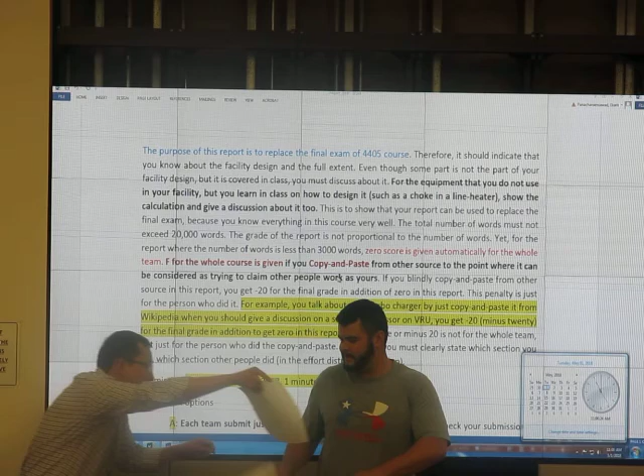For today, we will talk about the project. After we finish talking about the project, we will talk about homework, and then we will talk about flow assurance.

All right, the project. Who read this yet? Anyone read this? Question? No question? Really? There should be some question.

Okay, this time I will make the grading very accurate. What you will do is there are 3 sections.

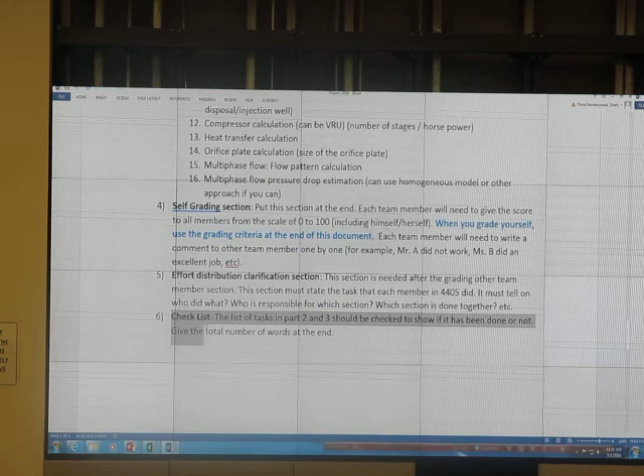See, section part 1, okay, part 2, part 3, okay, and you will do self-grading section, effort distribution section, and there's a checklist.

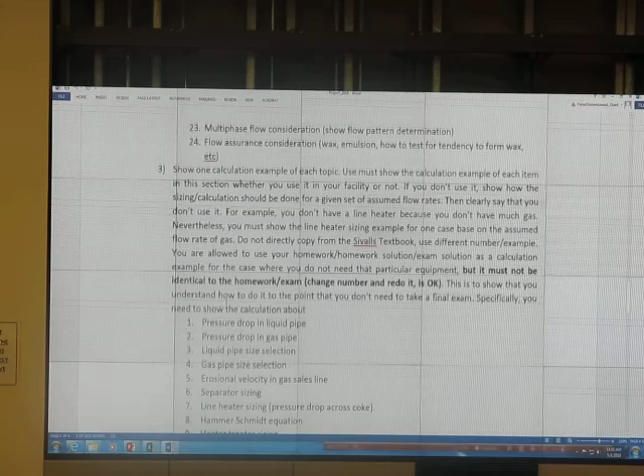Black one, okay, look at this. Calculation example, 40 points. If you do everything but you miss 4 points - everything means, okay, there are 16, number 1 to number 16.

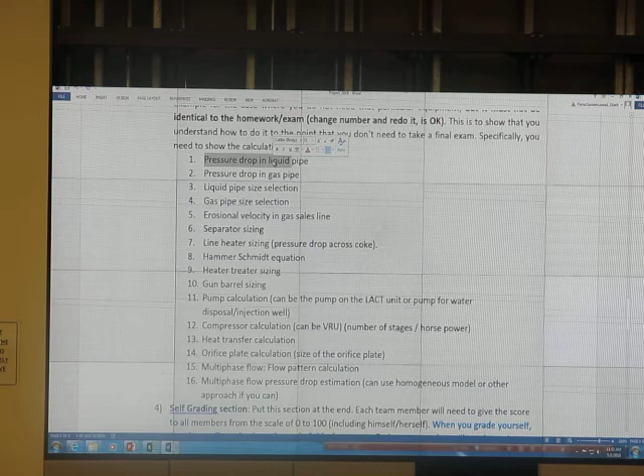If you miss 1, instead of 100, let's say everything else is perfect, you get 90. If you miss 2, you get 80. If you miss 3, you get 70. If you miss 4, you get 60. It is difficult to miss unless you intentionally try to miss it.

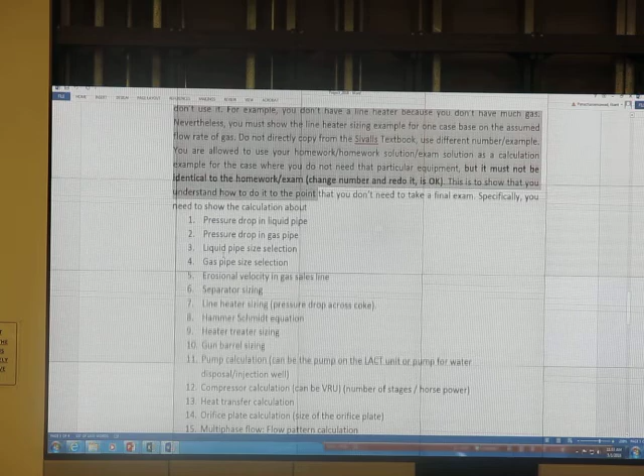So read it, but basically, whether you have the equipment or not, you will show the calculation for each of these.

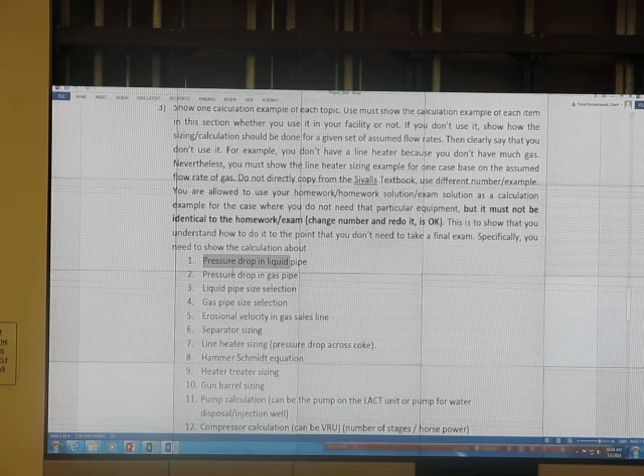If you don't have the equipment in your field, what you do is you say, let's say you don't have any liquid pipe, you say in this project there is no liquid pipe. Nevertheless, the calculation example is given here as follows, and you come up with your number - flow rate is this much, elevation term is this much, pressure drop or something. Got it? So whether you have it or not, you will write about the calculation part.

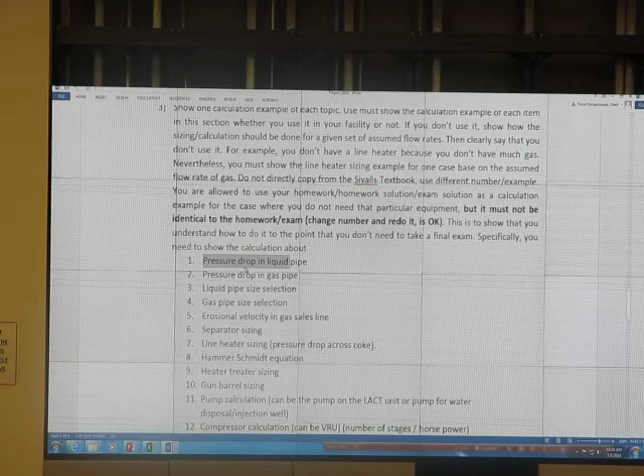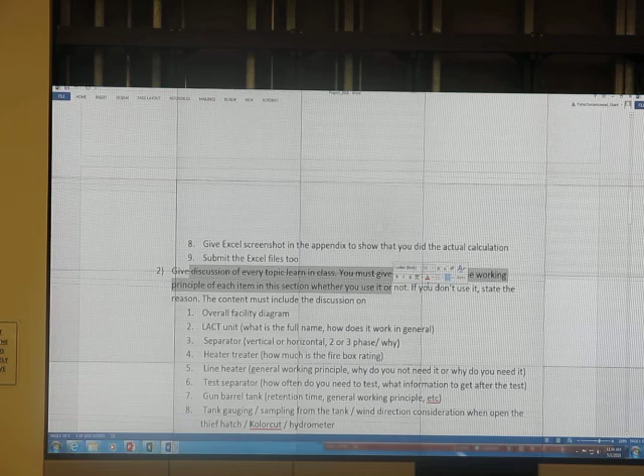You will do the calculation. And same thing is over here - give the discussion of every topic learned in class. You must give discussion on the working principle of each item in this section, whether you use it or not. If you don't use it, state the reason. The content must include the discussion on blah blah blah blah.

Let's say you don't use line heater - I think none of those groups use line heater, right? You will give discussion about the line heater. You say, okay, in this project, line heater is not used. The discussion of line heater is given here for the completeness of the project.

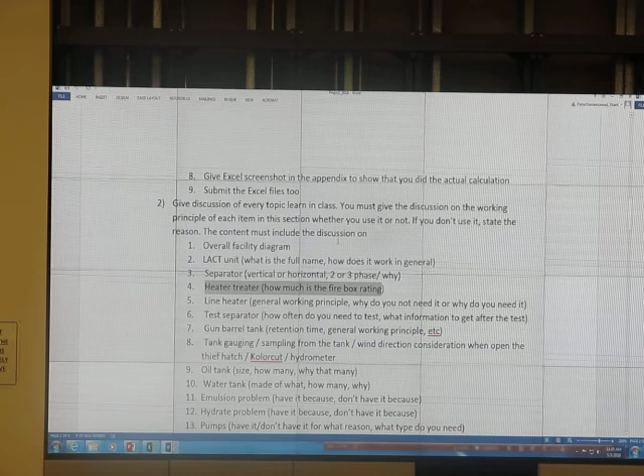Line heater is used mainly for preventing hydrate formation. The way it works is blah blah blah blah. You don't need to show any calculation example - calculation example is over here, line heater sizing. I know that you don't use line heater, but you say you don't use line heater.

But line heater sizing is based on this, so you show hydrate chart. Assume that hydrate formation temperature is this much, and assume your specific gravity is blah blah blah. You may take the homework or the exam question to show your calculation example, but it must not be identical - you have to change the numbers and redo it.

The purpose of all this is to make sure that you know everything in this class, and we can use it to replace the final exam. If something is already in your project, discuss as usual, but if it is not, you still show a calculation example on this part. There are 16 things to do calculation examples for.

And we have heat transfer calculation, we will cover it today. You will give the calculation example.

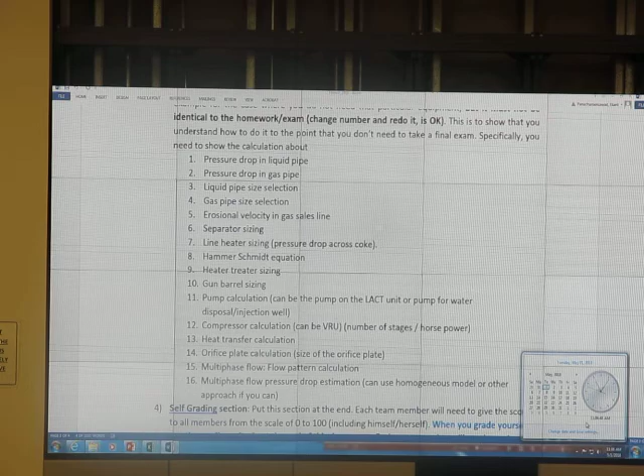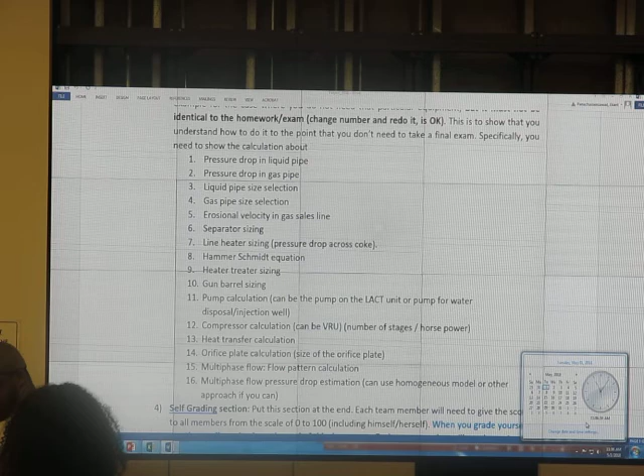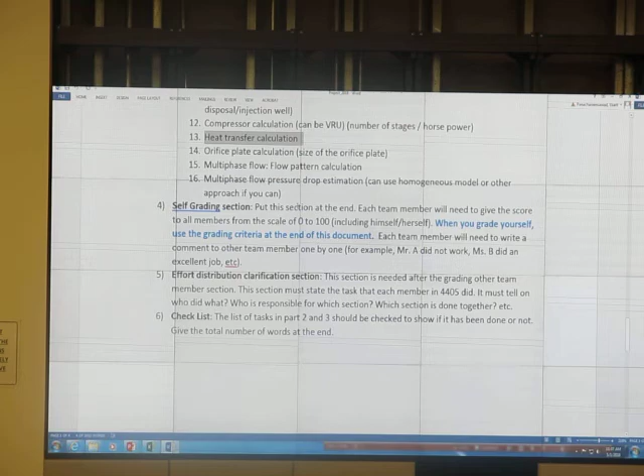All right, the new section is about the self-grading section. You have to put this section before the effort distribution clarification section.

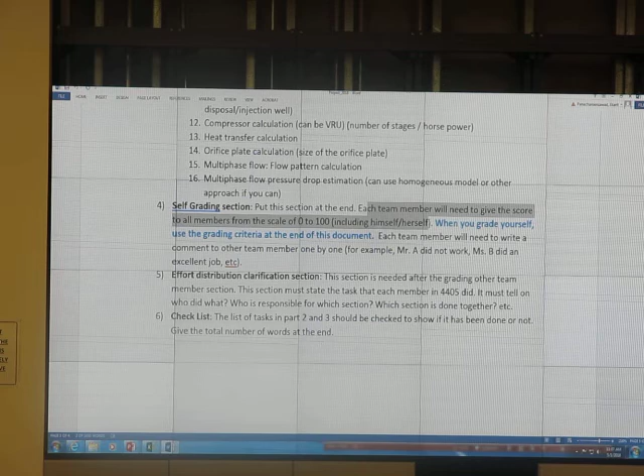Self-grading section: each team member will need to give a score to all team members from a scale of 0 to 100, including himself or herself. When you grade yourself, use the grading criteria at the end of the document. Grading criteria is this.

Appearance formatting is quite subjective. Teamwork is somewhat subjective. Calculation example is not quite subjective.

So let's say you didn't show one calculation example, the rest is just fine — you get -10 from this part. Subject matter discussion: let's say you didn't show one discussion, you get -10.

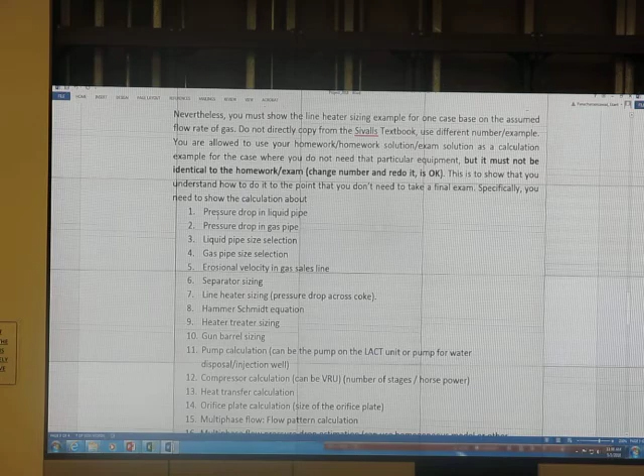So let's say my team has 2 members. I am in charge of number 1 to number 8 for the calculation example, number 1 to number 8. And for topic discussion part 2, I'm in charge of number 1 to number 12, and 12 to 24 is another team member.

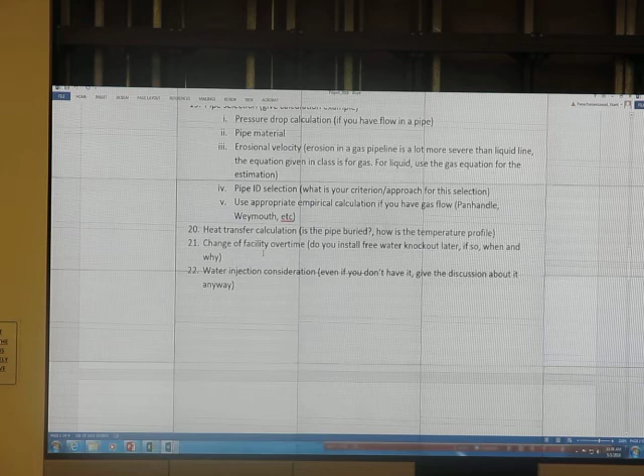So everyone submits just one copy per team, one copy per team. But you may do more — I will talk about it.

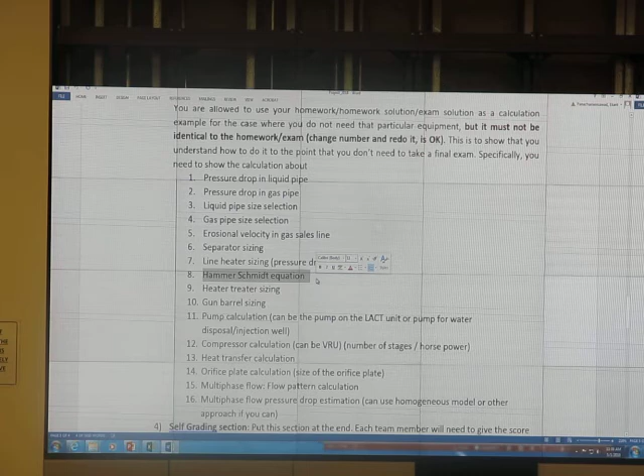So let's say my team member does it just fine, but I get lazy, so I don't do the unit discussion, I don't do the separator discussion. I don't want to do Hammer-Schmidt calculation because I don't have hydrate data, so I don't do that calculation. So I missed totally 3, right?

So in the effort distribution, I have to say, okay, I am responsible for number 1 to number something, and another team member is responsible for number 9 to number 16 or something. For the calculation example and discussion, another team member is responsible for number 13 to number 24 or something.

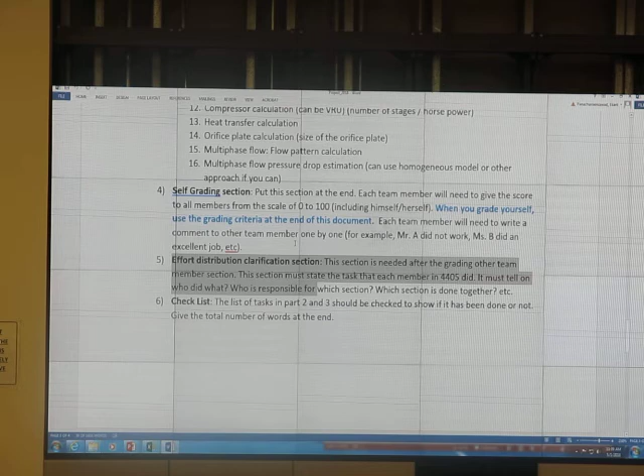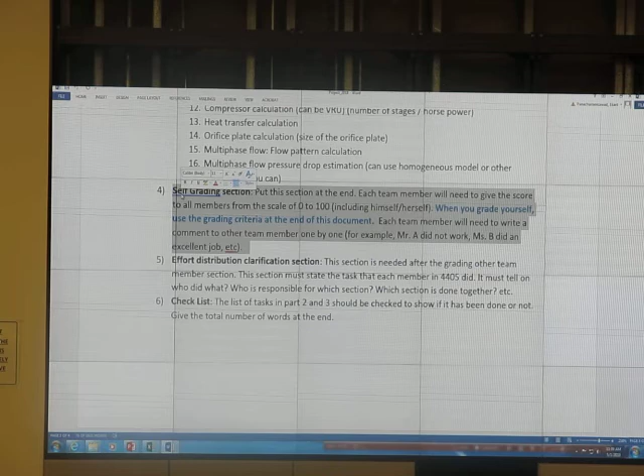So in the grading section, let's assume I give myself 100. My friend, a very good friend of mine, gives me 100 and gives himself 100 too. I also give him 100. He did everything, but I missed 3.

So I missed 2 discussions and 1 calculation — I missed totally 3. So when my team gives me 100, I give him 100, I give myself 100, he gives himself 100. But I missed 3, so missing 3 means 70. Both of us will get 70.

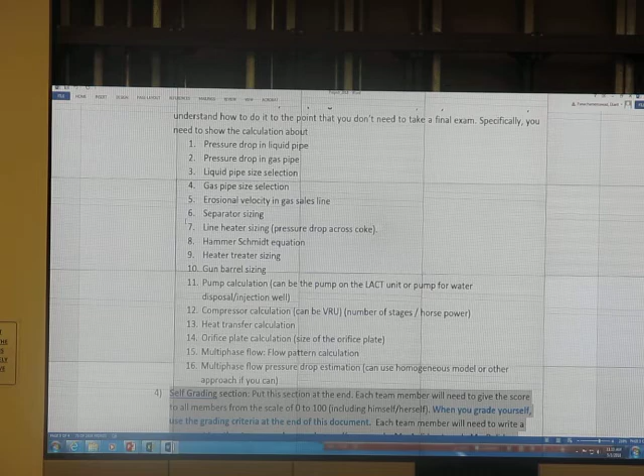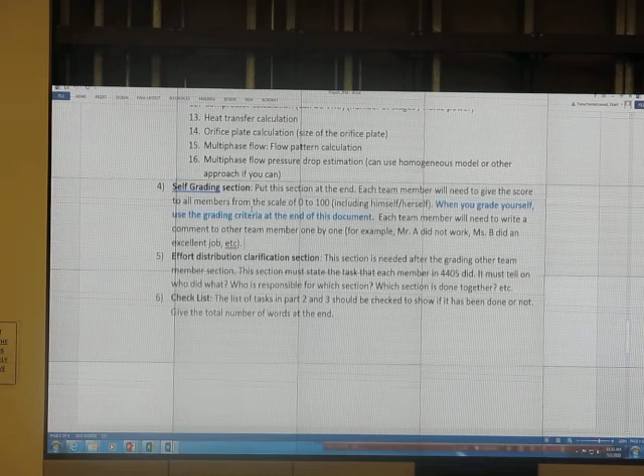Scenario 1. Scenario 2: I give myself 100, I also give my team 100 too. But my team says, hey, great, you should get just 70 because you didn't do the part you should do — 1 to 8 you missed 1, and 1 to 12 of discussion you missed 2, so you missed totally 3. We have good teamwork and the report looked very good, but you didn't do 3 of that — you should get 70 and I should get 100.

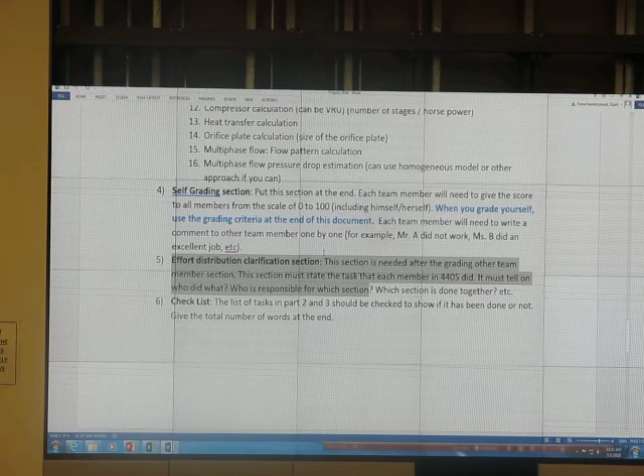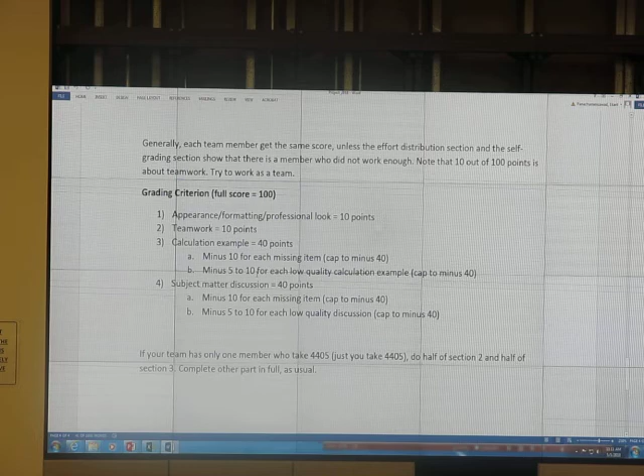So when I grade it and check, the effort distribution clarification section says a grade is responsible for number 1 to number 8 and number 1 to number 12 for the discussion part, but he didn't do 3 of them. So what I will do is give student 1 a grade of 70 points and student 2 100 points, okay?

So if everything is perfect, everything looks very good, and you want to get the same score as your teammate, just give everyone 100 — it doesn't matter.

But if you believe that your team didn't do it — except the team that discussed with me already, okay, there's one team, you know which team, right — all of you come to see me.

So I don't have any negative point on your teamwork. And if you are just one person in this team, in your team, you get 10 points free, 10 points, because you have very good teamwork — you're just one of that.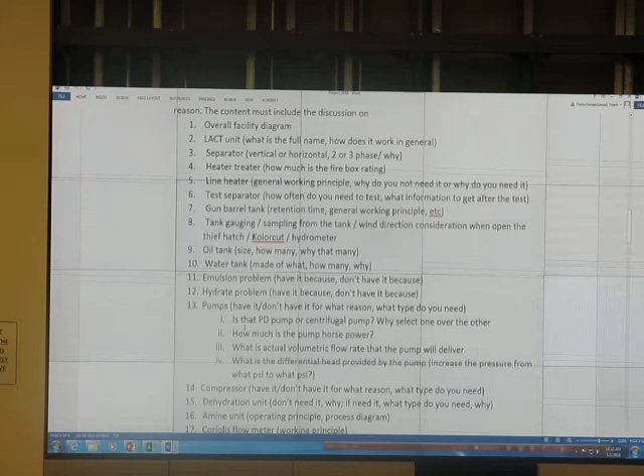If your team has only one member who takes 4405, do half of section 2 and half of section 3. Section 2 and section 3 are the calculation example and discussion. If you are only one, and it's only one group that has that condition.

So unless you have talked to me before and complained about your team member before, if you ever give your team member less than 100, the teamwork may be — let's say your team had 3 people, and one person didn't work, so you get what?

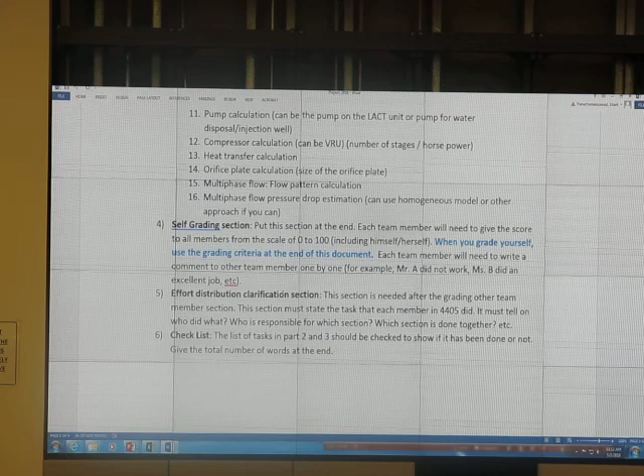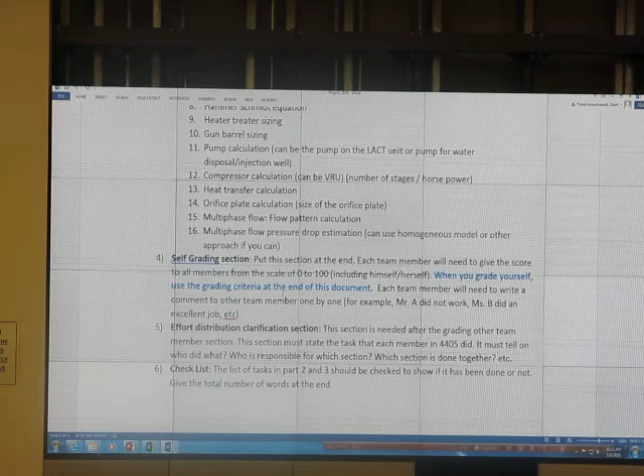2/3 multiplied by 10 - okay, so if 2 people didn't work, you get 1/3 multiplied by 10 on the homework, on the teamwork part. It's just not much, but if they really do something bad, then you don't get the score.

Let's say I have 2 members. 1 member missed 3 of that, I give him 70. So instead of 100, I get 95 because I don't have perfect teamwork. My teamwork is half of the team didn't work, so it's not quite teamwork, so I get 5 points off. But the rest is perfect, so I get 95. Another person gets 65 because he didn't do 30 points and missed the teamwork part. Your team doesn't have teamwork, so the teamwork score is the same everywhere. Another reason that is more than this.

Okay Rohan, we have a quiz today. Do you want to take it? Yes, please come, yeah come take it. But write on it that you are here at 11:13, which is late. Okay good, yeah no problem. You already have extra for him?

Alright, another reason that you want to give your team member less than 100 is, for example - no intention to talk about any previous case or anything. Let's say we talk about compressor and your team copy and pastes from Wikipedia about turbocharger in the car, which is completely irrelevant. You say, hey, team member number 1 is responsible for points 1 to 6, but didn't do anything on the calculation part. And I found that in that part it's copy and paste from Wikipedia - didn't cite anything, okay, he did that.

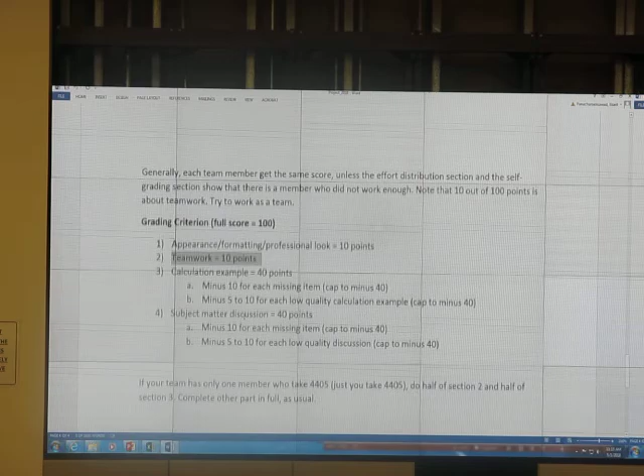So your team has 5 members, and 1 member didn't do anything, but you talked to me previously that he didn't work. He should, please work. But he didn't work. I didn't minus any teamwork score on it because you complained about it, right, very early. So I put here, I think there's a grade something.

The grade of this report is not proportional to the number of words. Yet, for the report where the number of words is less than 3,000 words, 0 score is given automatically for the whole team - if it's too thin, less than 3,000 words, everyone just gets 0, to be easy for me. F for the whole course is given if you copy and paste from other sources to the point where it can be considered as trying to claim other people's work as yours. If you cite, it's not the same as trying to claim other people's work as yours. Even though you copy 2 sentences, 3 sentences, or maybe even one paragraph from Wikipedia, but you say, okay, it's from Wikipedia, I didn't write it by myself, but I should not rephrase or anything - so I grade as usual.

But try to limit word by word copying. You should rephrase, or make it match your situation. Just cite, but if you can, don't try to copy word by word. If you just copy word by word and cite, and the whole report is more than 3,000 words, I don't think that's fair for me, you know. And I will find out who did that.

That particular person - minus 5 to 10 for each low quality example, or minus 5 to 10 for each low quality discussion. If one section, let's say about line heater or compressor, you just copy from Wikipedia, I may just give you 2 - you Google it, you see it, you didn't rephrase it, I don't have any evidence that kind of information went into your brain, so you get 2 out of 10. Doesn't need to be 5, right? If you do very bad, typically it's minus 5 to 10.

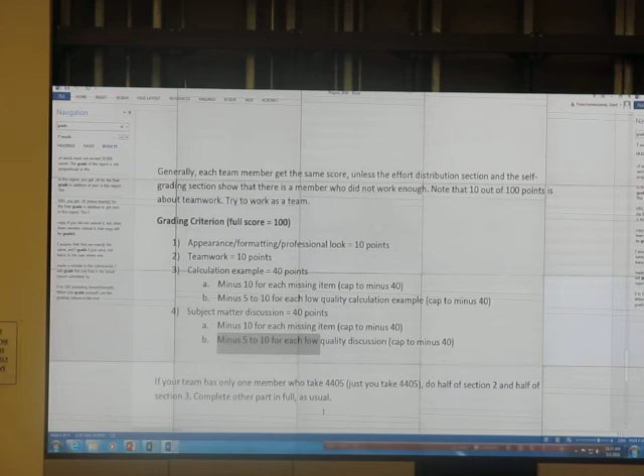Yes, question - hypothetically speaking, for that group that has the thing, do they need to do that teamwork thing to grade all or no? For the group that has that thing, they need to do the individual teamwork, so the teamwork part. Let's say your team has 5 people and 1 didn't work and you talked to me before, okay?

If that team member didn't work again, you get teamwork 10. But if that team member worked, but another team member in your team that you didn't complain against didn't work, then you get 8 instead of 10.

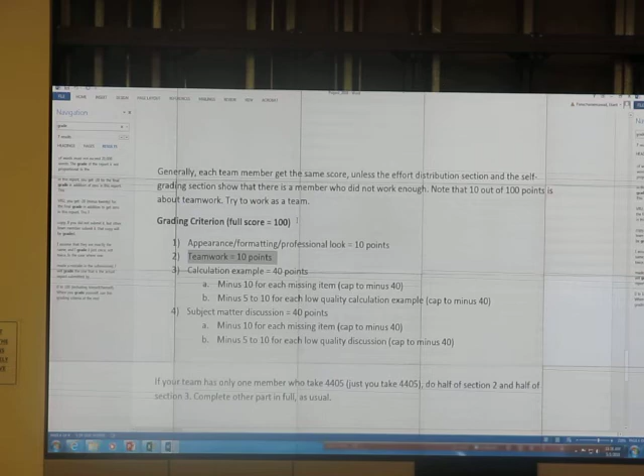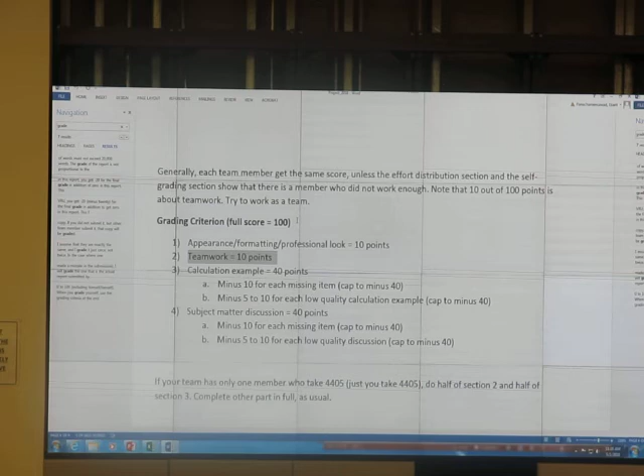For the exam, the score is graded partially, and one student got 104 or something, another student got... yes? I was raising my hand, that was me. One student got 104 and another one got 100 something. You want me to clap my hand? Really? That's you, right? Well, I'll go and check if you really got 104.

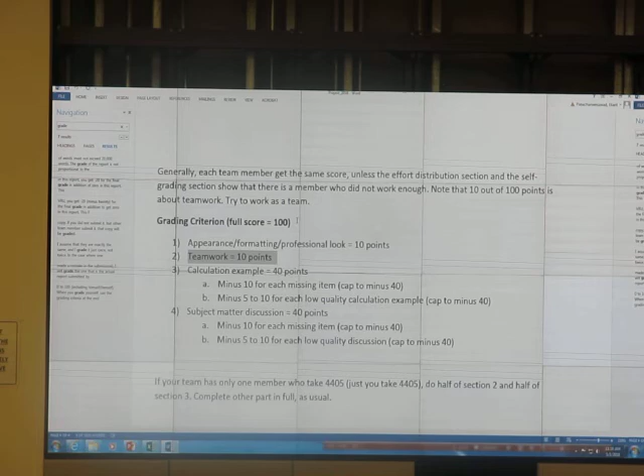Okay, are there any negatives yet? We come to zero, when we get to zero, you get less than that. Tomorrow Arya will finish all the grading and give the grade to everyone. We will discuss more on Thursday about what we do. I think you guys are being good students and you come to class every time, right? Most of you, otherwise you write your report. So overall it's kind of good. So I may have to consider something.

We'll talk more on Thursday. So wait until the score comes out, it may not be that bad. Arya told me the average is maybe about 70 or something, or 68. This means if we have people that get 100 and the average is 70, this means some people also get 40.

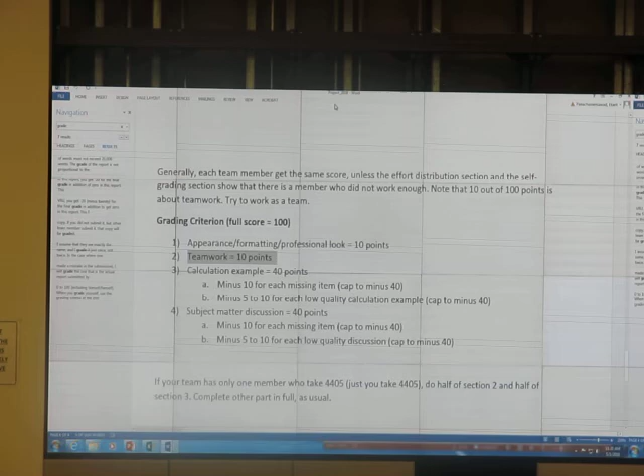That's some kind of concern. So for the question that no one got right except me, I've been thinking about it. I know the end of the semester is coming up, but there are several options for doing that. I haven't decided yet. Option 1, don't do anything. That's option 1.

Option 2, on the blackboard I already uploaded the exam and exam solution, exam 2 that you did. Anyone seen it? It is in exam, 2018 exam, exam 2018 solution. The whole calculation is in the Excel sheet. I didn't make the complete solution, but it will give you some idea of what it is.

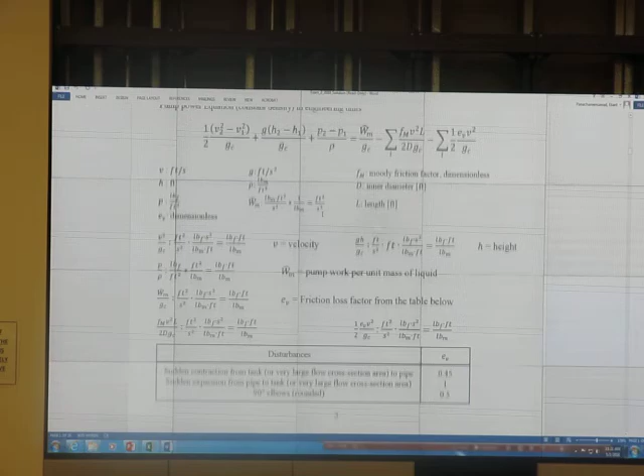The part that I cannot do anything about is like the first part. I can be a little bit more generous, but that is on the calculation part. Like for example, this kind of thing, it's just -1, 0, or +1, I cannot do anything. Okay, and the solution is here.

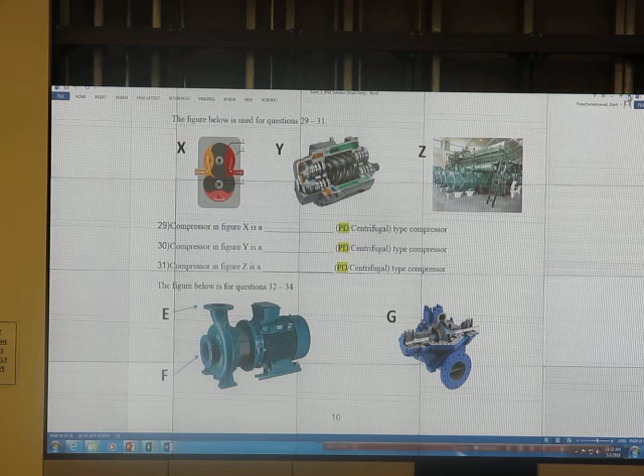Try to check it. The reason I uploaded this is maybe for some student who is about to get an F or a D or something, I may just say C is fine, at least for me. So I may ask them, with the consent of like 2/3 of the class, can we have that person write all this by himself and increase the score to 50 instead of 0 if he gets 0. But I may not do anything, I'll take a look at the score first because I don't think it's that bad, right?

And that's the exam solution. Homework, we have the last homework uploaded. I didn't upload it last Thursday or last Friday or Monday. You need to take this class before you can do the homework. I understand it's a very busy week for you. I'll discuss about the homework now so it helps a little bit. So assignment 10.

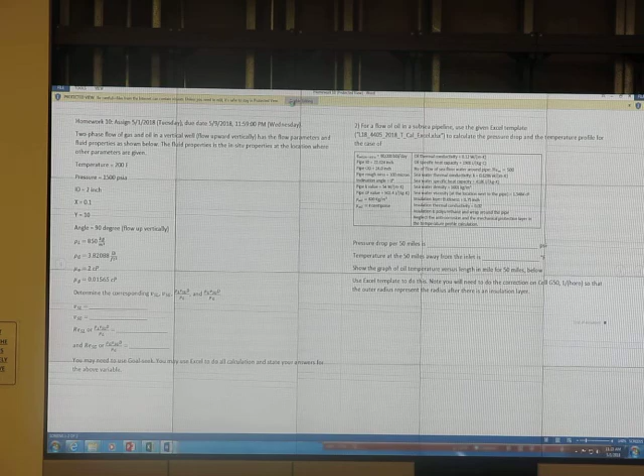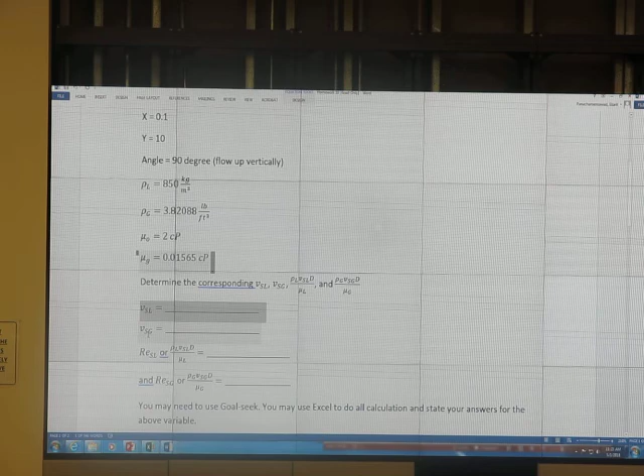In this assignment, everything you can do by Excel. So the first one is a two-phase flow question. I give you X, I give you Y value, and I ask you, what is VSL? What is VSG? What's the Reynolds number? To do all this, you need to know the formula. The formula is the formula for X and Y, it is in the lecture itself.

So what happened is, if I know that it's annular flow, what is the corresponding standard cubic feet per day or something for flow in the well? So if I have the annular flow, what happens? So what you have is X and Y, but you are asked to calculate VSL, VSG. This means you need to use Goal Seek, or you may use some other method. Once you put all the formula in there...

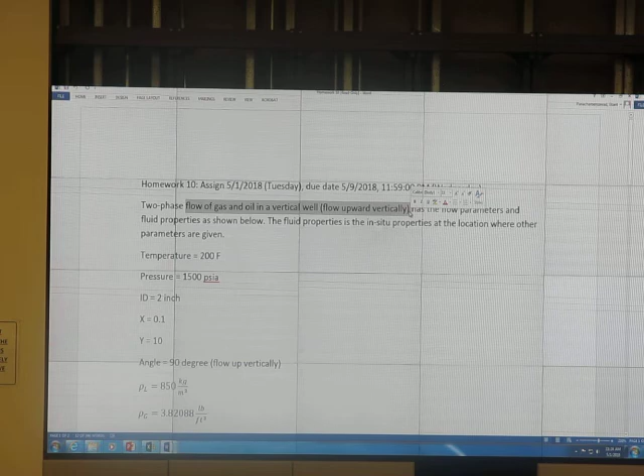So I think X is 0.1, Y is 10, and theta, that's my theta, flow upward vertically, so theta is pi/2. Angle of theta is pi/2. So I have X equal to 0.1, that is 1, 0.1 is over there, and Y is equal to 10. So my point is about that point.

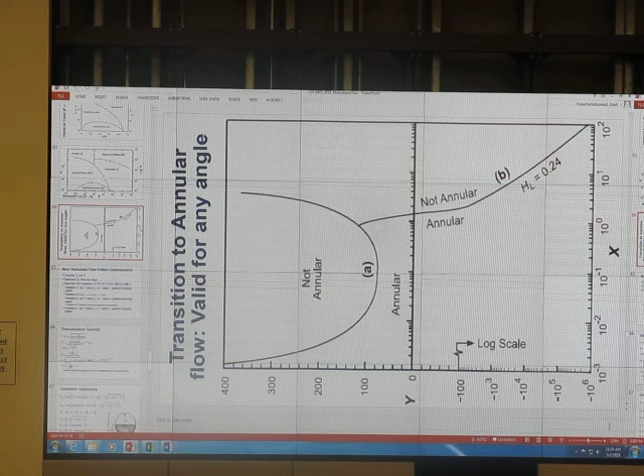Okay, my point is about that point. So that is the operating point. I would like to know what is VSL and VSG to make that happen.

Based on VSL, VSG you can calculate the flow rate, right? But it's kind of implicit because when you know the angle, sin theta equal to 1, you know G value, 9.8, right? Fluid property is given. So you can directly calculate this based on the Y value minus dPdL, which is this term on the bottom. But this term on the bottom, you have VSG over there and VSG over there. So you may have to change VSG until your bottom part equals what it should be.

So you may have to use trial and error, or you may do an analytical solution. I think an analytical solution also exists, but you can also do trial and error. First, y is equal to 10, put 10 over there, you can do it, right? You know the density of each, substitute the value over there. You know the g value, substitute it over there. You know sin theta, substitute it over there. Then you can calculate the numerical value of minus dPdL.

So your test is, minus dPdL is defined as this. Use method 1, the analytical method. Method 2, trial and error, change VSG until minus dPdL matches the value that you get when you calculate based on y. Once you get minus dPdL sub SG, you get the bottom part of this one. Based on the y value, you can adjust VSL until, but you have to take the square root, okay? Adjust VSL until x becomes 0.1. Good, so it's just trial and error, very easy.

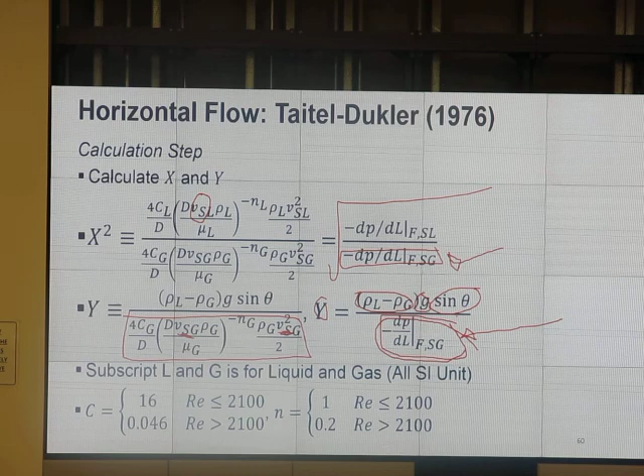Okay, I don't quite worry much about that. How long does it take to do that? Put the formula in, do it, double check it. Less than half an hour. Should be half an hour easily.

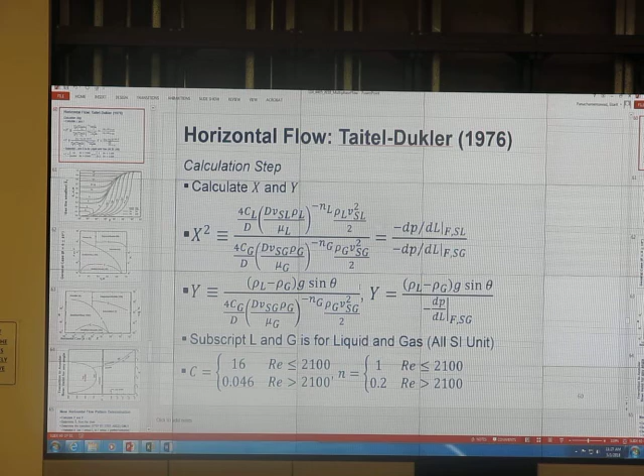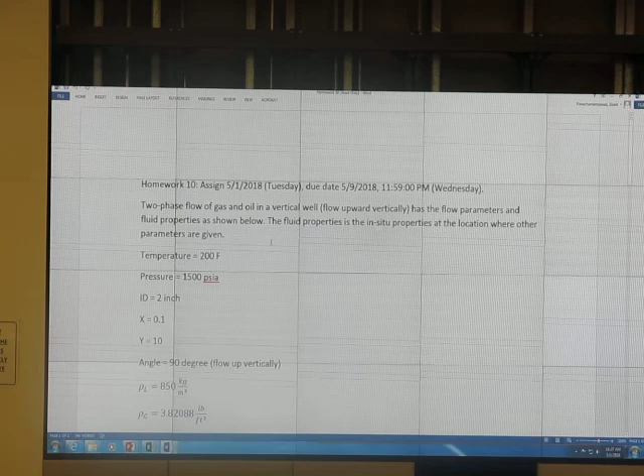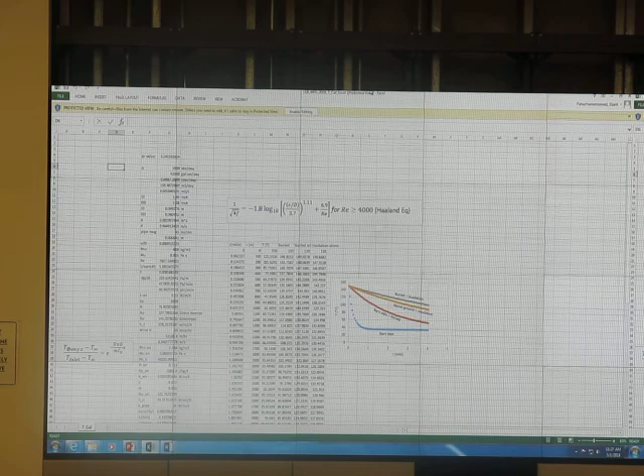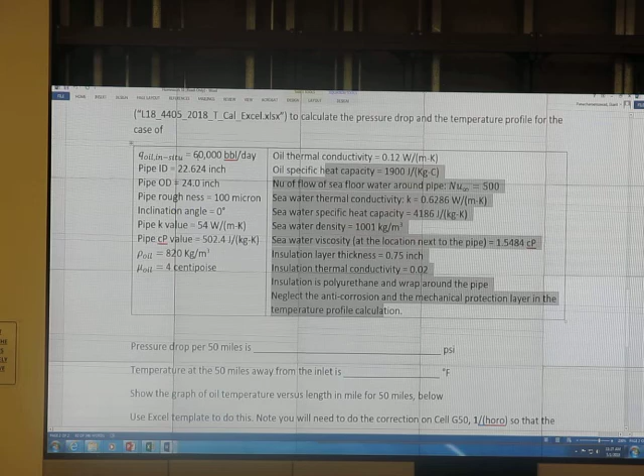Okay, another one is using the Excel template. Question 2: for the flow of oil in a subsea pipeline, use the given Excel template to calculate the pressure drop and the temperature profile. This is the given information. It looks like a lot, but basically you will open this file, the Excel template, already uploaded. For example, you have to change from 1,000 Q to be 60,000. So you use the existing template, but you do some adjustment.

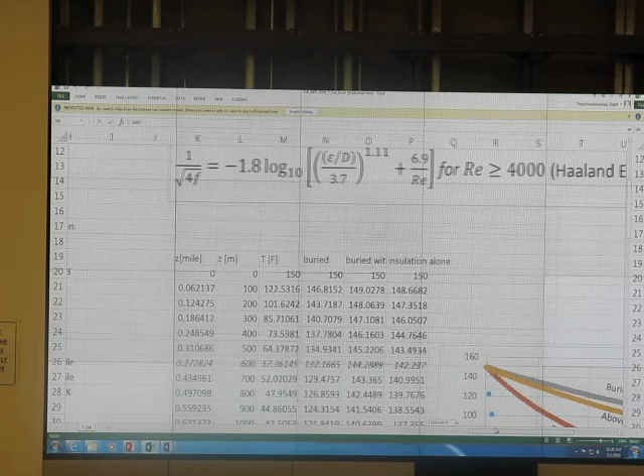And you do the calculation of the temperature profile for the case of an insulated pipe. This one is insulated pipe but not buried. Okay, we insulated but we didn't bury. And you should be able to give me the graph. Select the right graph, but you have to do some adjustment first.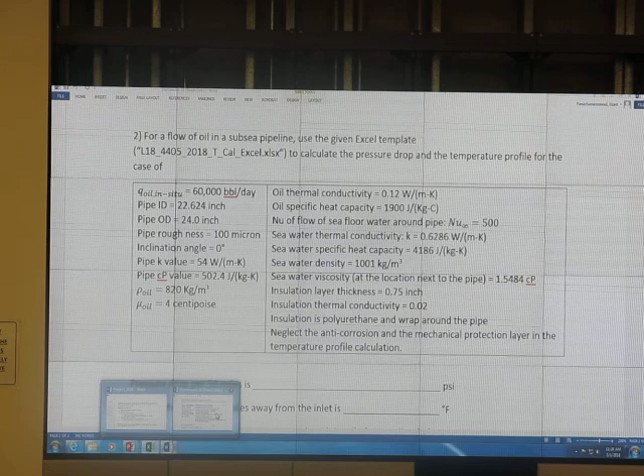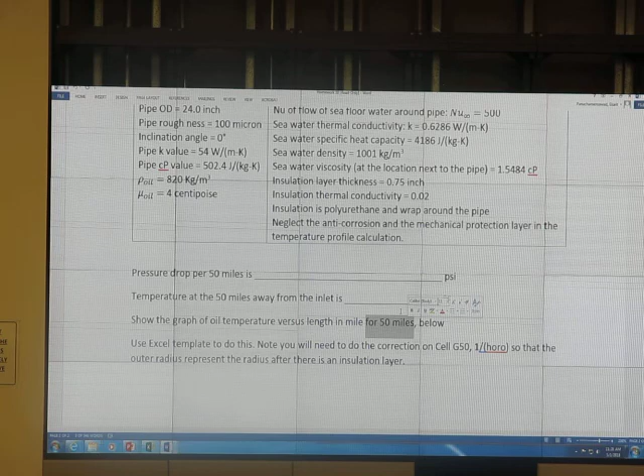Maybe you add, you see this L20, you start from 0, that's okay, but instead of plus 100 you plus 3,000 meters, so every step you jump like that. Or maybe, so I change from 3,000 to be 1,250, and then I double click on the corner. See, I click this one, I change the formula inside to be plus 1,250, and I double click on the corner. So everything changed, so now my profile will be up to about 50 miles.

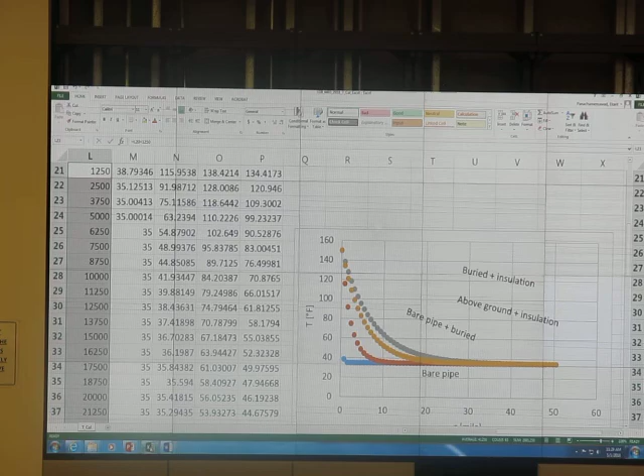Okay? Good? We'll talk more about this on how we do it in this lecture. Are you ready? Yes? Okay, last time we talked about the formula, and you already wrote out the formula.

I know that this equation for temperature profile estimation is just given without derivation. Just have to trust me that it's correct. It is derived based on the assumption that we reach steady state for the velocity profile. Velocity doesn't change with time, that's the assumption. Assumption number 2 to derive this equation is that the temperature profile reaches equilibrium quickly.

Okay, temperature profile reaches equilibrium quickly, why do I say that? Think about this: if your pipe can store a lot of heat, even though inside the pipe is hot, fluid inside the pipe is 140 Fahrenheit. Initially the pipe is at 60 Fahrenheit. It may take a long time for this 60 Fahrenheit to reach like 140 Fahrenheit, because the pipe itself can store some heat, right?

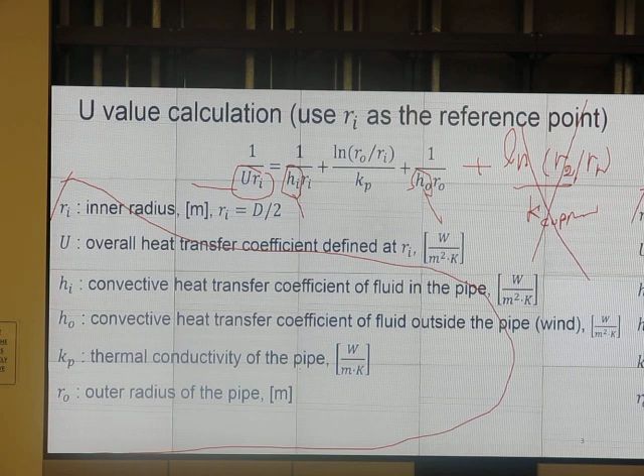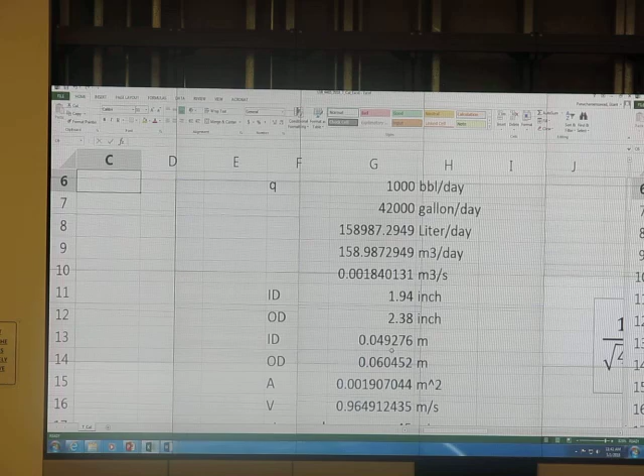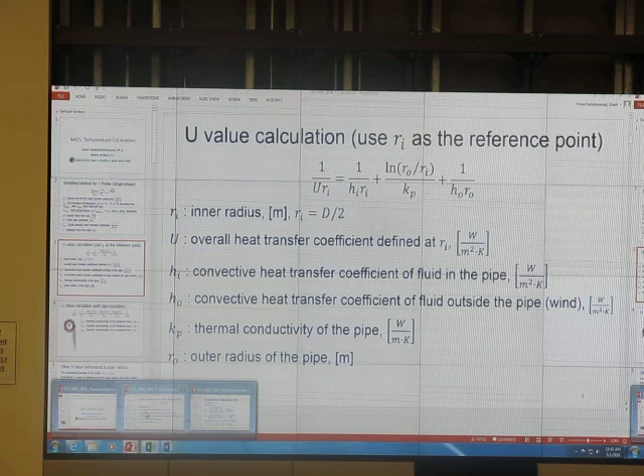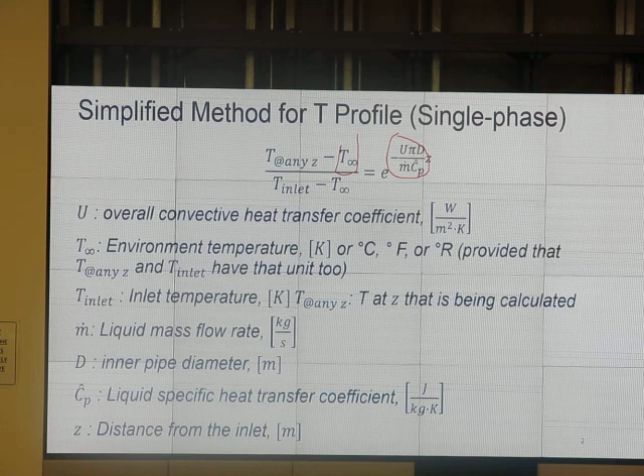In the Excel file that is given to you already, I have one cell called exponent without z. So I have minus 2 something, okay? That's the exponent without z. So that exponent is this term, okay? That exponent is this term.

So I just use, once I find the exponent, I know T infinity or 40 Fahrenheit. Then I go back here, then I can tell the temperature of the fluid. At the beginning I put it as 150, no problem, right? 150, no problem. Next cell, you see the formula M20 minus 35. 35 is, in this case, T infinity. So you should change it to 40, right? Because your case is T40.

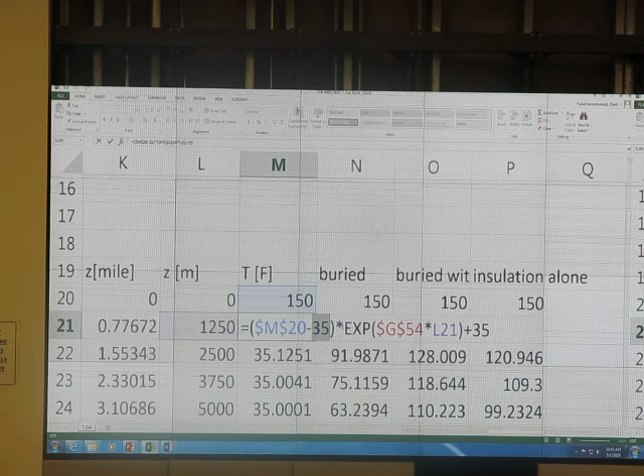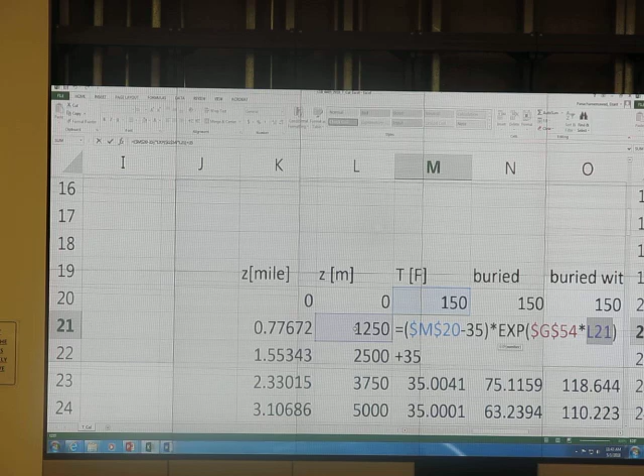Multiplied by exponential of G54. G54 is the exponent, and L21 is this length in meters, length from the inlet. And plus 35 - plus 35 comes from this part. The formula we have, I just multiply the whole bottom thing by this part and add T infinity. So for your case, in the homework, T infinity or environment temperature is 40 Fahrenheit. So you have to use 40.

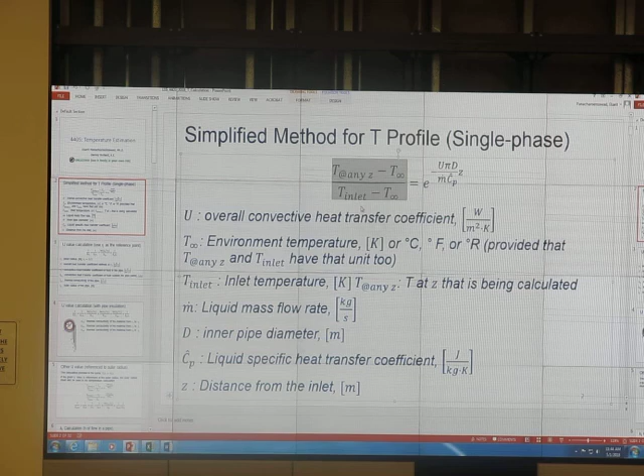Okay? The unit on this side has to be matched - what if you use Fahrenheit for everything. If you use Celsius, use Celsius for everything. The unit on this part has to be SI, SI only, because your CP value typically you get in SI. Sometimes you may have it in BTU or something, but okay.

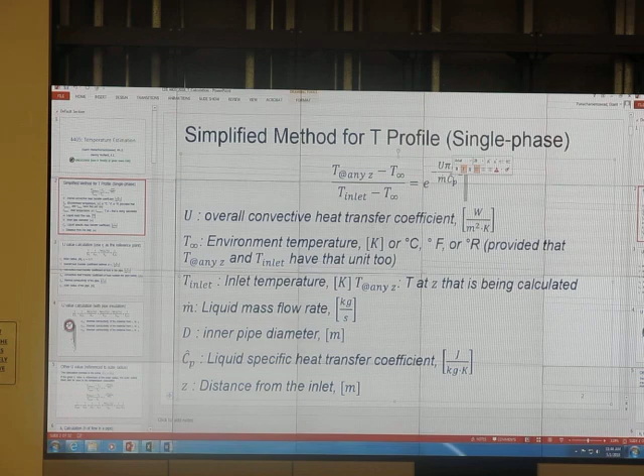So if U is given, it can be calculated and then you can plot the temperature profile, right? Questions? Question? No question?